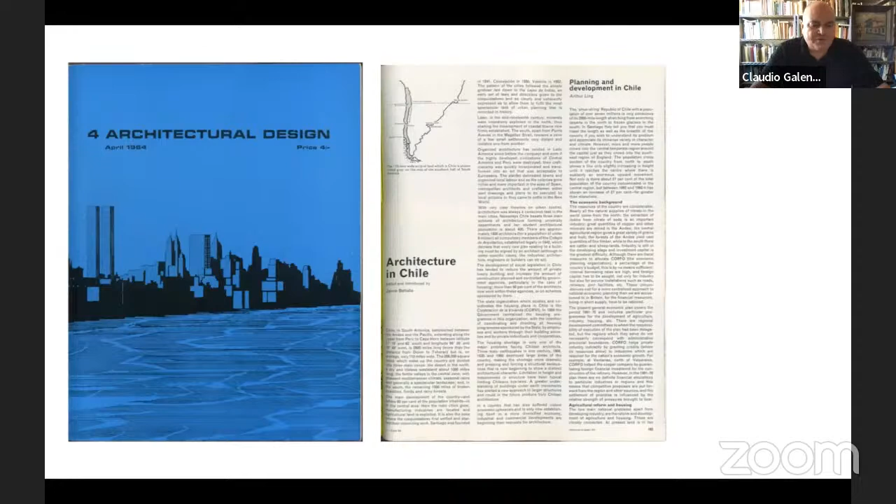This particular condition forced design with structural rigor, which over time defined an architectural identity. Some years later, architectural historian Ramón Alfonso Méndez, in an article for the Spanish journal Hogar y Arquitectura in 1970, declared that from a technical point of view, earthquakes had conceived a prudent people and forced them to take special precautions in structuring their architecture. Architect Oscar Barahona Álvarez, in another article about Chilean architecture published in the Spanish journal Nueva Forma in 1972, indicated that earthquakes characterized the constructions.

Until that date, several high-intensity events had devastated various areas of Chile: Valparaíso in 1906, Chillán in 1939, Concepción and Valdivia in 1960, La Ligua in 1965, Tocopilla in 1967, and Illapel and La Ligua in 1971. The expertise developed in facing these aggressive events had resulted in light constructions with limited life, or in very heavy architectures, resulting in high cost in foundations and structures.

As a summary, in the 80s, architects Humberto Eliash and Manuel Moreno stated that the Chillán earthquake of 1939 had been one of the main variables that had materialized modern architecture, preceded by another determining incident, the Talca earthquake of 1928. Finally, we will highlight what architect Max Aguirre stated, who said that earthquakes had been drivers of modernity.

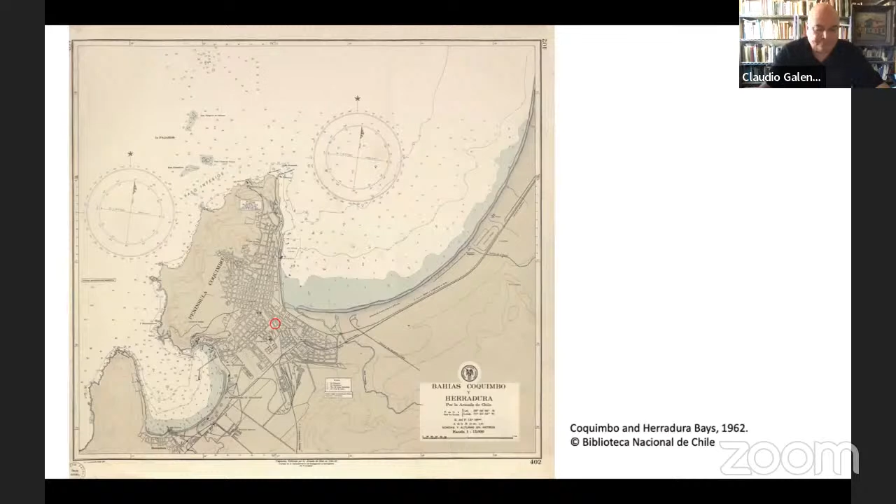Despite the impact of the 1967 earthquake, in April of 1970, the Minister of Health, Patricio Silva, confirmed that at the end of that month they would call for a public tender for the construction of a new hospital, and that the works would begin in July.

The new establishment would be built on land donated by the municipality of Coquimbo in the San Juan neighborhood, a sector to the southeast that was just beginning to be urbanized. On September 4 of 1970, a model of the hospital was displayed in the window of the El Ferrocarril store in Coquimbo to disseminate the new project, and towards the end of that year, the founding stone of the new establishment was laid.

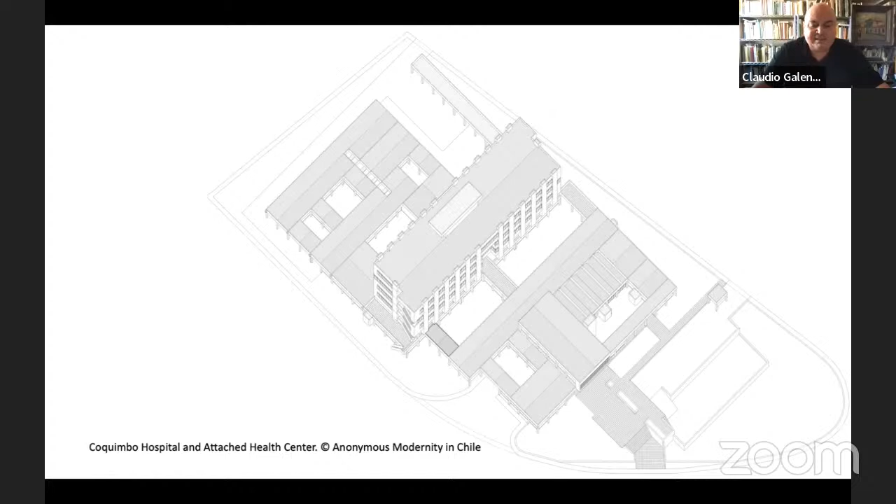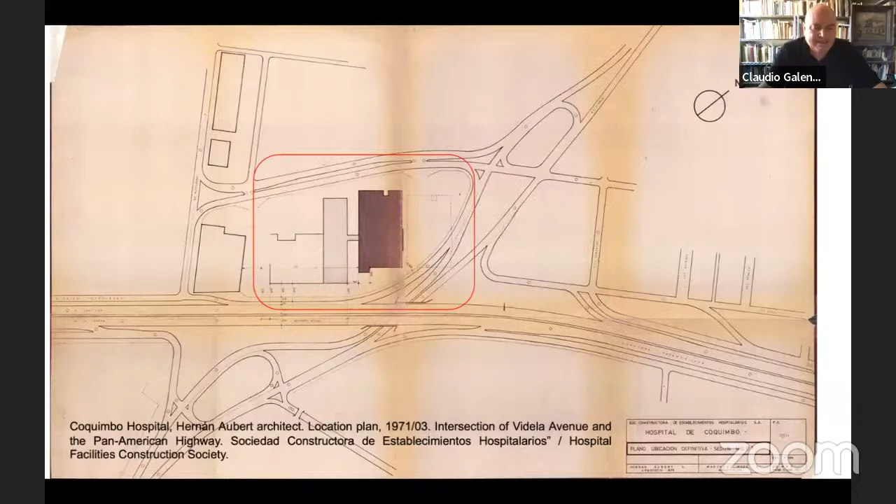Although the Sociedad Constructora de Establecimientos Hospitalarios, the Hospital Facilities Construction Society, had already started construction in the San Juan neighborhood at the end of January 1971, the press announced that a decision had been made to change the hospital location to a plot of land at the intersection of Videla Avenue and the Pan American Highway. The decision involved the Urban Improvement Corporation, or CORMU, which stated that the change was necessary because the land in San Juan was isolated, while the new site would be more integrated and serve a more comprehensive medical, technical, and urbanistic purpose.

However, on the land in the San Juan neighborhood, an urban general clinic or health center was built, which was inaugurated in June 1972.

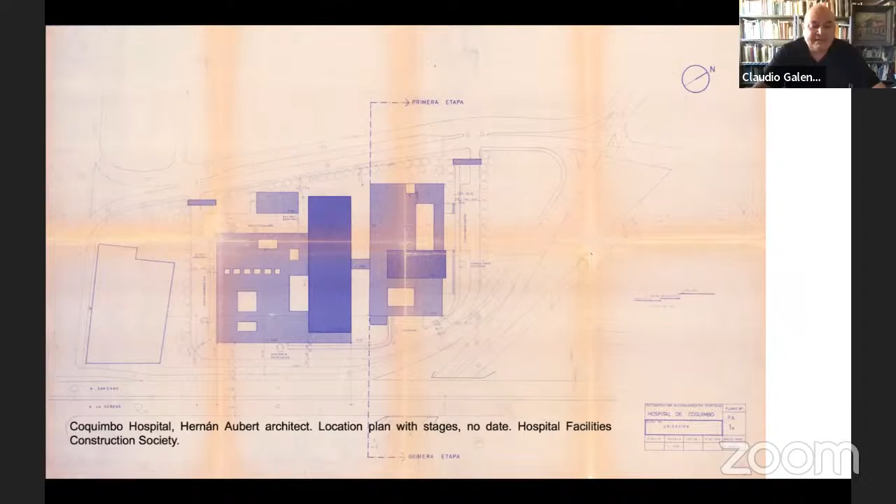The geomorphology of the chosen hospital site was an extensive plain, the isthmus of the Coquimbo Peninsula. It's no coincidence that the area is known as El Llano. It is a relatively flat urban space, but elevated like a low plateau, opening especially towards the west and east to the bays of La Herradura and Coquimbo. It's characterized by a pronounced horizontality.

In the course of the early stage of construction, the Coquimbo area was affected by a new earthquake on July 8, 1971, with its epicenter located between Illapel and La Ligua. Although this event did not impact the newly initiated construction works, it did affect a number of other facilities in different cities, leading to a plan for repairs, replacements, and construction of healthcare facilities carried out by the Hospital Facility Construction Society. In the province of Coquimbo, the replacements included the hospitals in Combarbalá and Illapel. The new hospital was built in two stages.

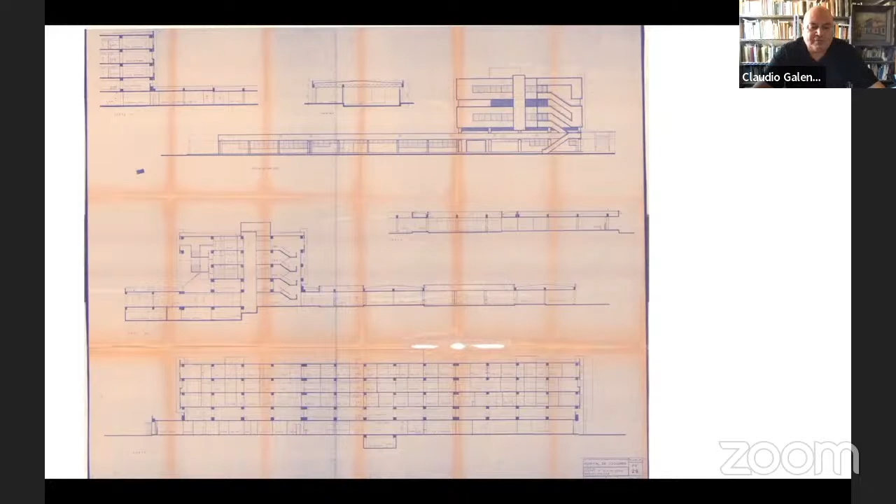On October 13, 1972, the northern volume, known as the Consultorio Adosado or Attached Health Center, was inaugurated, while the hospitalization tower was completed entirely by the end of 1975, with the transfer of service from the old hospital commencing at the beginning of 1976.

While the tower was being prepared, on March 13, 1975, a new seismic event occurred. As indicated by Urrutia and Lanza, the epicenter was in the sea in front of the port of Coquimbo, and its intensity was of a magnitude of 7.

There were 2 fatalities, 30 injured, and significant damage to public and private buildings. As Gonzalo Araya notes, at that time the medical service was being relocated from the emergency area on the first floor of the attached health center to the 3rd floor of the tower. However, the earthquake did not bring significant problems to the facilities, which had just been completed.

Finally, the hospitalization tower volume and its base volume extending to the south were inaugurated on March 26th of the same year. The press said, the most modern hospital in Chile. It exhibits impressive modern architectural lines and an excellent location.

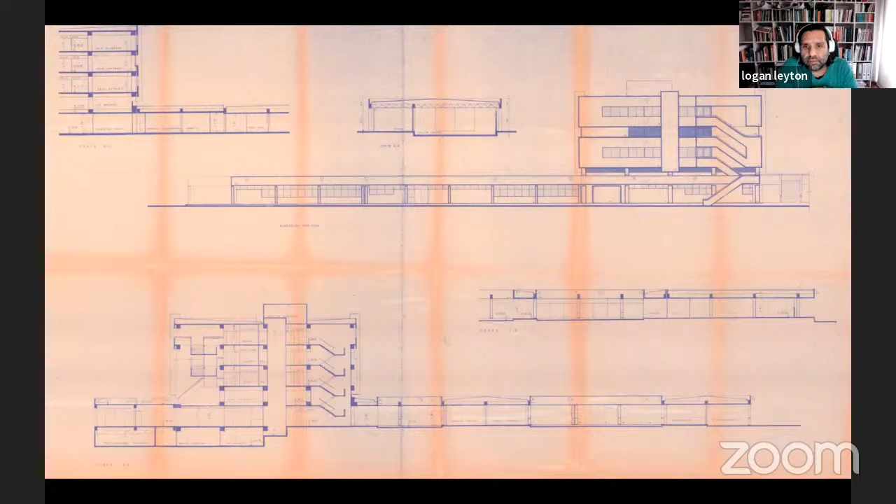Now we can see the installation plans. The next one.

So in May of 1980, the magazine Ciudad y Arquitectura published an article about the hospital, and through the report some errors appear: the sense of the north, a presentation of a first version of the project with 4 building levels, so it doesn't mention the mechanical floor in the second tower, and also the general organization complex use is very, maybe difficult to understand.

The magazine report also explained in terms the slab-tower type, but we have to see another thing that they don't mention—another change that the team of architects made in this typology, this family of buildings.

So we can see here that the building, or the tower precisely, is made by these pillars that are retracted from the facade. So we have this volume, these vertical volumes, that appear in the facade.

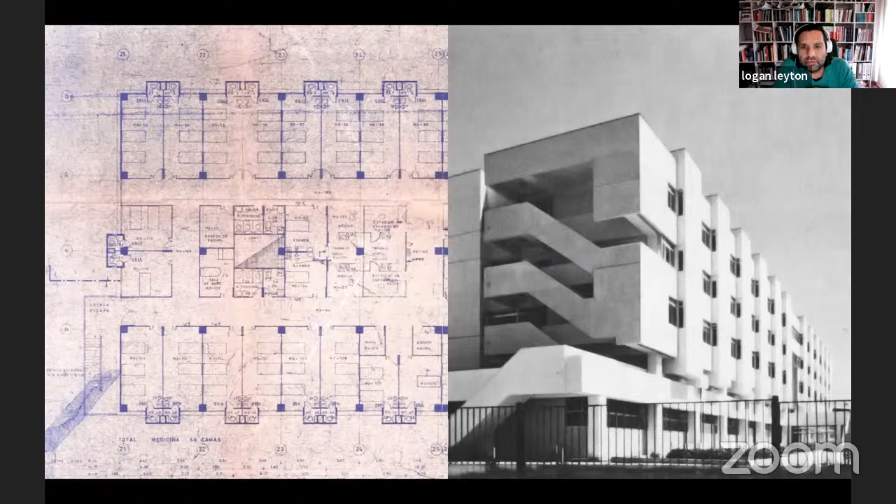Next one, please. This encounter, this movement from one side of the highway to another, produced an encounter of a different street, and this encounter is very special because it becomes the main entrance to the city of Coquimbo, on Avenida Nolasco Videla.

Between Nolasco Videla, a space forms between the streets at a bifurcation, and this bifurcation makes another street, Dr. Mucarcel. From a distance we cannot really perceive the street between the hospital block and the small park. The park is on the left hand of the screen, and the little hill where the hospital is located is on the right. It's also a little difficult to define the limits between the park and the small hill, with trees and natural species between the two spaces.

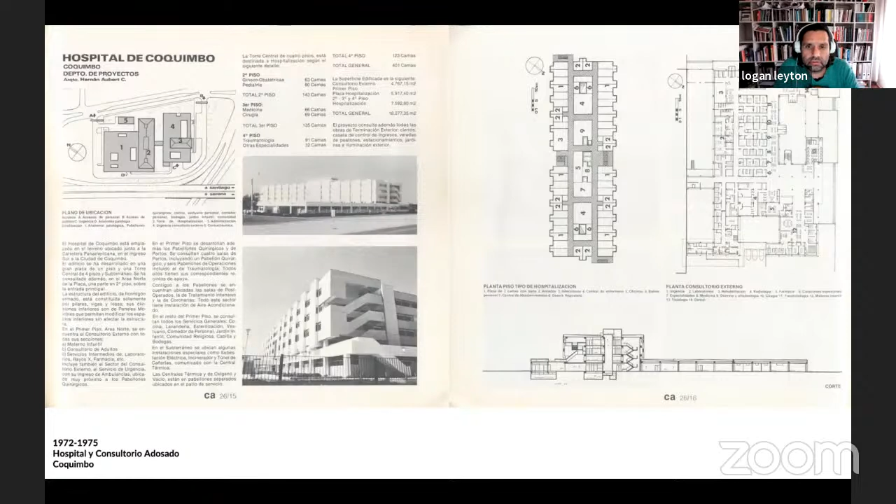Give me a second, please. Okay, this is again the establishment, the hospitalization floor. Next one, please.

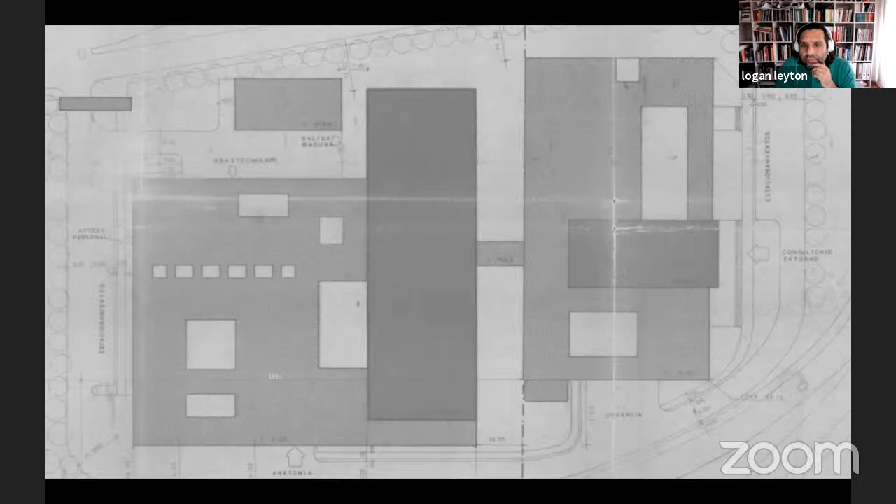And we can see here a different kind of yards. All the spaces that are not marked are different yards. The different colors also indicate different programs, and the height of the plaques. We see here the two plaques, and the middle one is the tower. Next one, please.

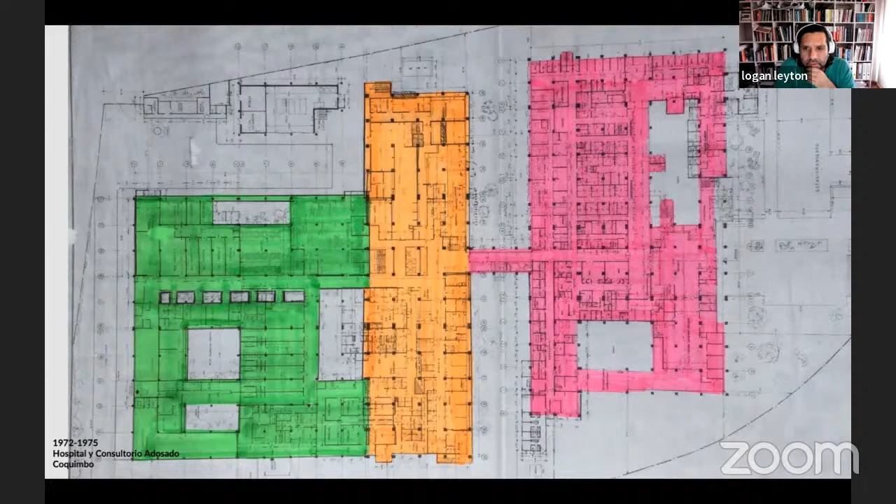We can see different yards. This is the entrance, where we can see the open space, or the access. We can see one for the chapel, another for the community, another for the kindergarten, another for the casino - not a gaming casino, I mean like a restaurant or coffee shop. Now we can see that it's very structured, very hard, very severe.

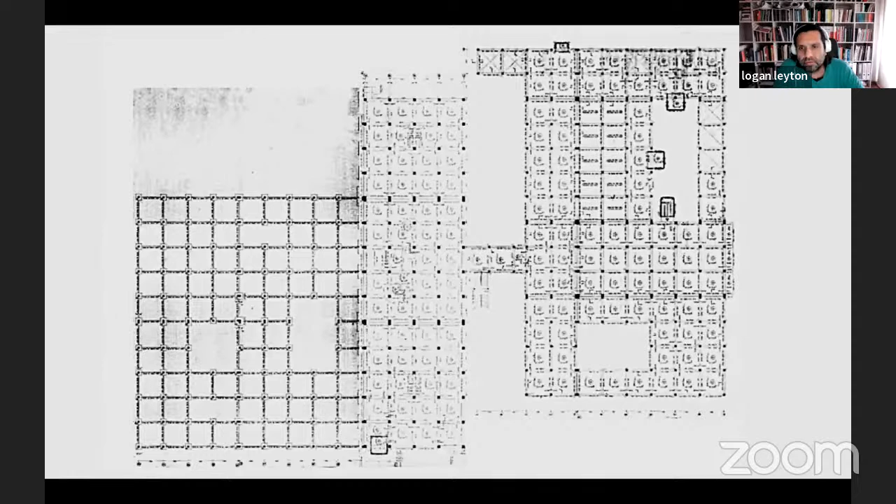Maybe we can see it again in a different way in the next slides, please. So this is the kind of relationship where the more intensive red color marks what is not allowed - the more private areas. The clearest red is the circulation area, and the middle red are the yards that are completely open, not just to the sky but open to the people, without access control. So the hospital is not just a succession of three different political and mandatory presidential moments.

Frei made it the law that financed the hospital. Allende moved it, changed it, and really directed the project. It was one of the most important projects for his government.

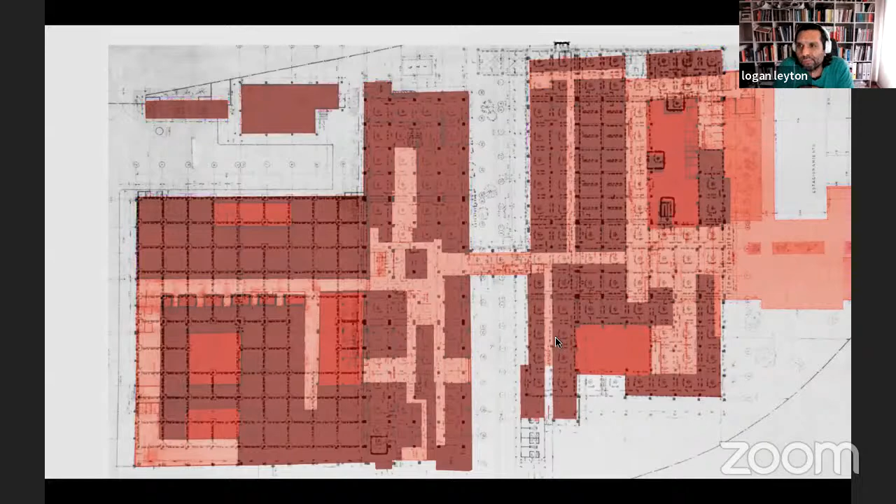Well, that's our presentation. I have some more, but I prefer to continue with Marco and Francesco for the time. Thank you very much.

Thank you. Okay, let's get started.

You see, it's clear. Yeah, perfect. Okay. Last time.

Thank you. First, at the beginning, we want to thank you for this invitation. We are very happy to have this opportunity to contribute to this initiative of Docomomo and this theme about healthcare architecture. We are professors at the University of Cagliari in Italy.

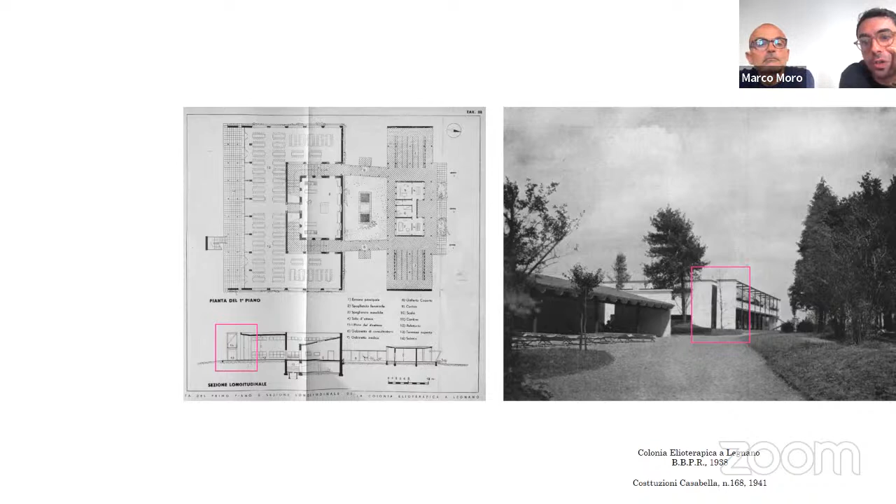This is an interesting detail compared with Ubaldo Badas' Colonia Dux, to understand his original approach. In fact, he combined all the functions in one single piece of architecture. He was clearly in search of a perfect balance between rationalist abstraction and plastic organicism.

According to our colleague and leading expert on this building, Paolo Sanjust, this project seemed to look beyond the Alps, without the mediation of Italian architectural culture, which only adopted the sculptural expressiveness of concrete in the mid-late 50s.

This emerged from the sequence of five project variations, all sharing the same plan: a multi-level curvilinear volume combined with a smaller entrance volume. The most substantial changes concern orientation. In the first version, the convexity is directed toward the sea, while in the second, and also in the built version, the curve's concavity is directed toward the sea.

Another big change concerns the structural solution. The first project showed a traditional load-bearing structure; in the later solution, a mixed structure with a concrete skeleton. The volume is suspended above a sequence of robust, rounded pillars that liberate the view toward the sea.

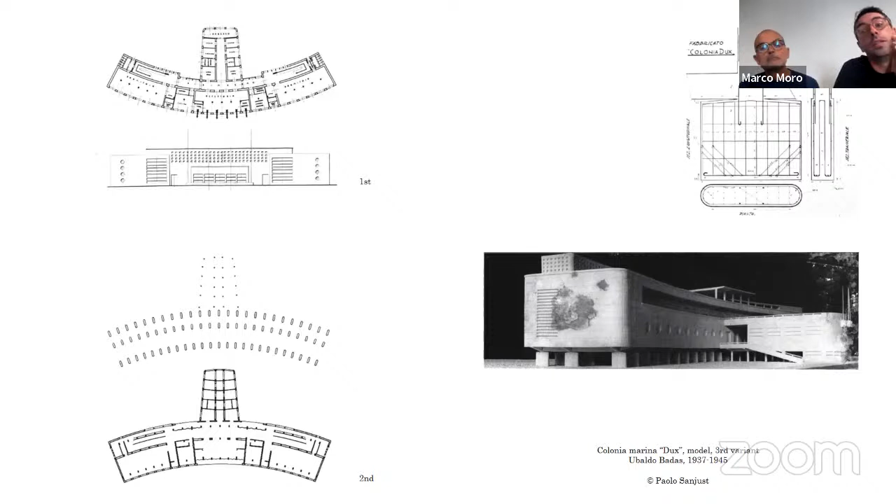The variegated register of windows is a remarkable element of rationalist architecture. Finally, among the distinctive elements of this typology, we notice the large ramps. Indeed, circulation and movement between inside and outside was a disciplinary ritual controlled by architecture itself.

This is the skeleton, almost finished, and this is the form in which the building will be delivered to the Anti-Tuberculosis Consortium in 1945. On the rooftop, you can see the addition of a wonderful pergola for sun bathing, integrated into the building to fragment its volumetric mass.

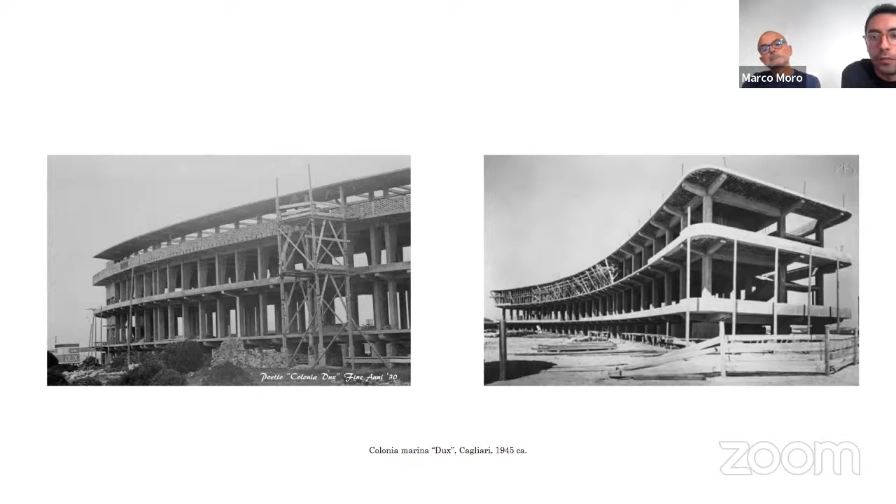In the end, the Colonia Dux designed by Badas is an unfinished work, not only a typological shift stimulated by functional distribution, but an attempt to build an artificial landscape in dialogue with a natural one. Not only the material expressiveness of an isolated building, but a modern architecture which incorporates intermediate spaces, free ground floor, and roof terrace, to promote an alternative project of the city.

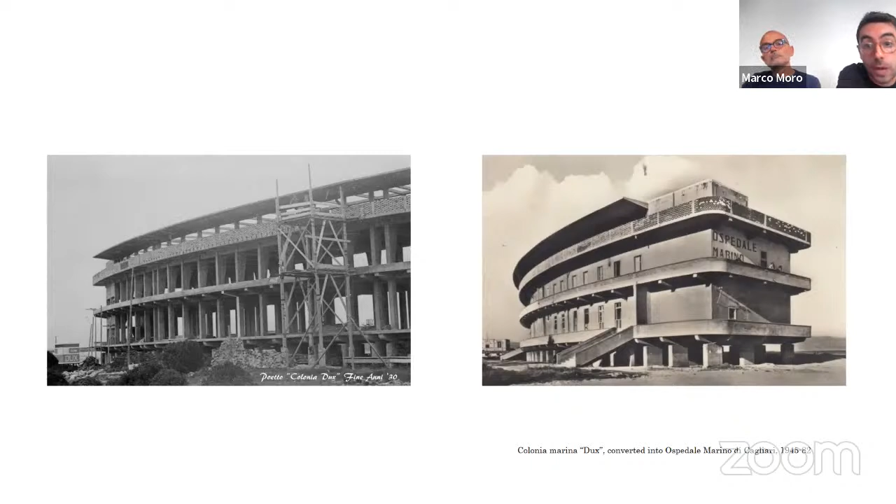Starting from 1945, the building was completed to be used in the emergency situation of the second post-war period. Simultaneously, both the external closure and new internal distribution were built for the uses of a new hospital, Ospedale Marino, which was definitely closed in 1982 and abandoned to its fate as a modernist ruin, with its internal skeleton as the only original element.

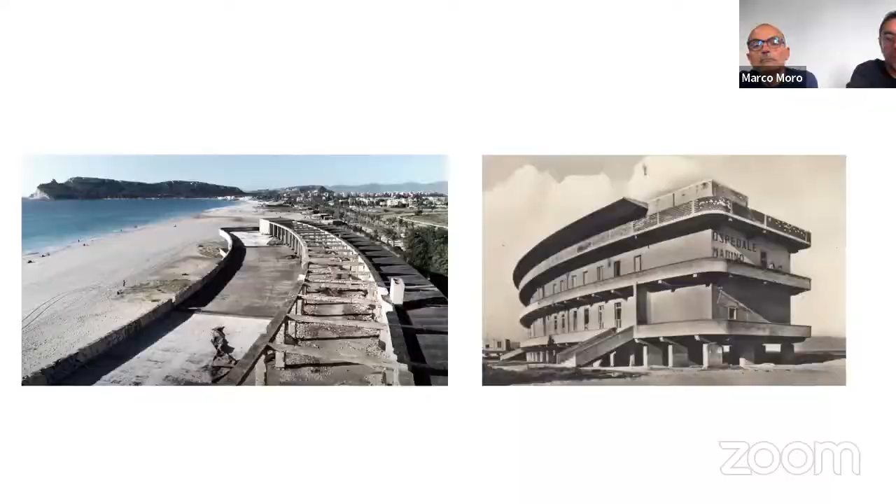As we said at the beginning of this presentation, this episode was preceded by a remarkable example of a machine hospital. The neoclassical San Giovanni di Dio hospital was built outside the medieval city. This building is emblematic in the design evolution of the modern typology, and in particular an outstanding case in the local context for the urban transformation of the city of Cagliari during its modern and contemporary history, and like Colonia Dux, is still waiting for its adaptive reuse.

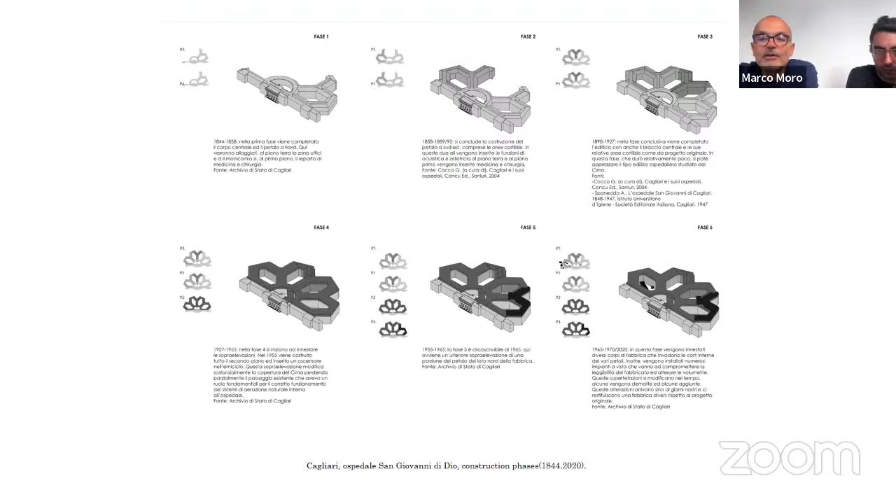We tried to understand the reason for this singular shape, considering that Gaetano Cima started the design of this building in 1842, after 1772. 1772 was a particular date because it was the date of the fire of the Hôtel-Dieu in Paris. The tragic destruction of the Parisian hospital started a very intense confrontation among architects and scientists, all called to study a precise prototype for a modern and rational hospital.

So we think that Gaetano Cima was very much influenced by these studies, and we can see a few typological examples, especially of radial types and of barracks types. The debate was opposing spatial organization models: central planning versus parallel rows.

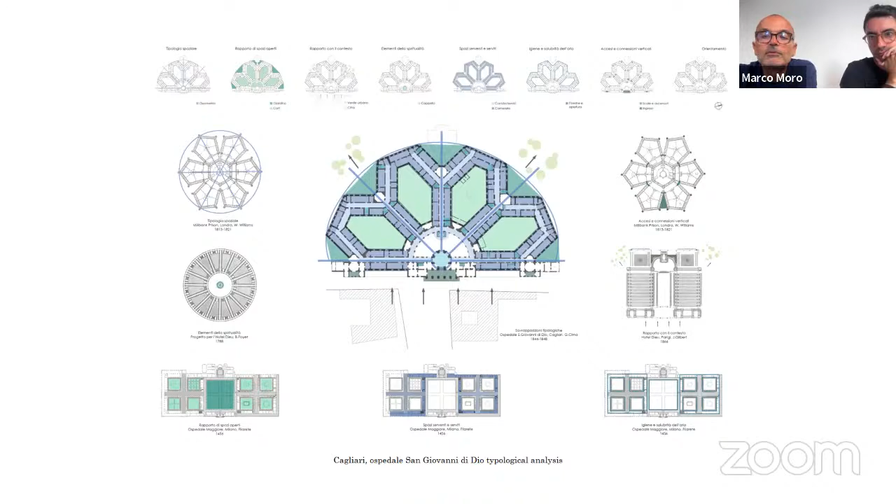The design by Cima is interesting because it is a hybrid solution that solves the contradiction of these two models and recomposes the fracture of form and function in a unitary response, compliant with the requirements of hospital organization and also responding to neoclassical style ideals of universality.

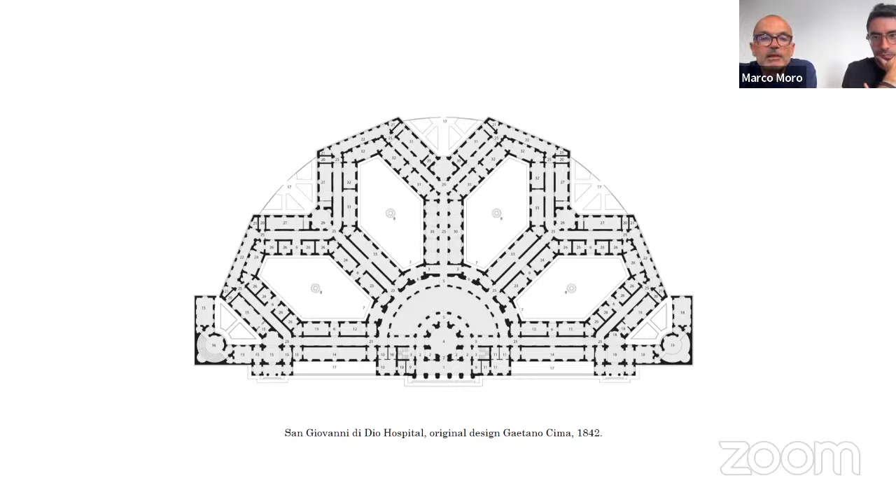So there was the original design of 1842, and it is a peculiar answer combining these types - a combination of the palazzo type and also the radial scheme, and also a remarkable example of separation of the complex into distinct wards. So the result is a radial plan reconceived as really a modern machine à guérir, to use Michel Foucault's words.

So we have worked on this aspect, developing a strategy that tries to overturn this point of view and considers these types as an integral part of the city, open and in continuity with the surroundings.

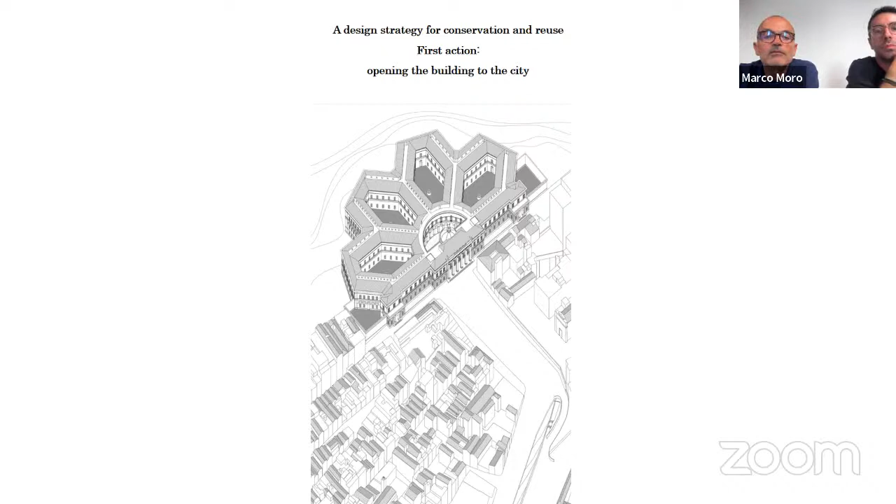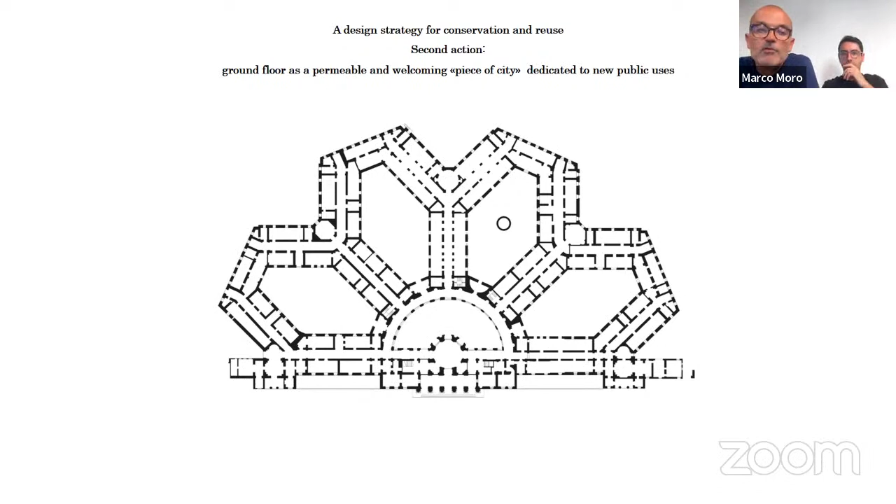So we tested our strategy based on two actions. The first action is opening the building to the city, creating new physical connections, entrances, and paths in peculiar parts. The second action, strictly related to the first, is about liberating the ground floor - imagine it as a permeable and welcoming piece of city, open and dedicated to new public uses. Freedom and movement characterize the use of this walkable piece of city.

With students, we concentrated just on a fragment of this building, the yellow part you can see, and we asked the students to apply different schemes, as you can see in the slides, which were kind of a prefiguration of new ideas of space. That was the start of the design. Imagine the strategy of reusing the space was about not modifying walls, but modifying the perception of space.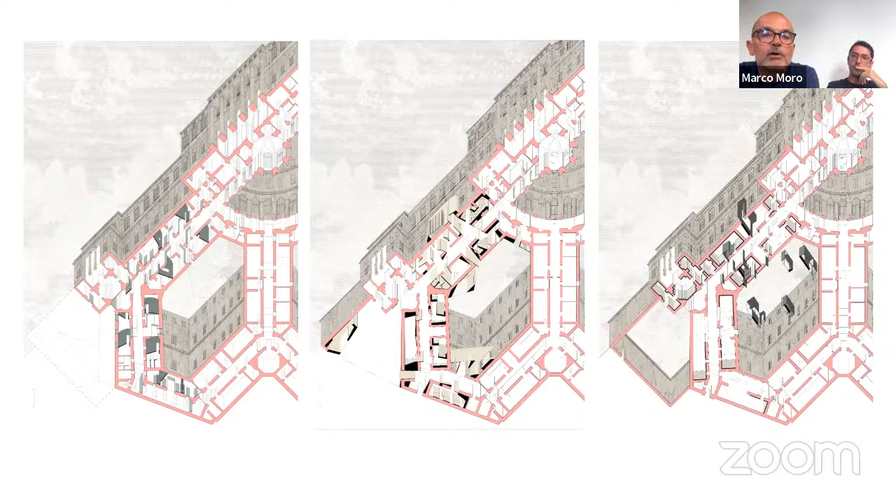So we limited the alteration to the historical material, except where the minimum revision of the walls and the material was justified as a critical action.

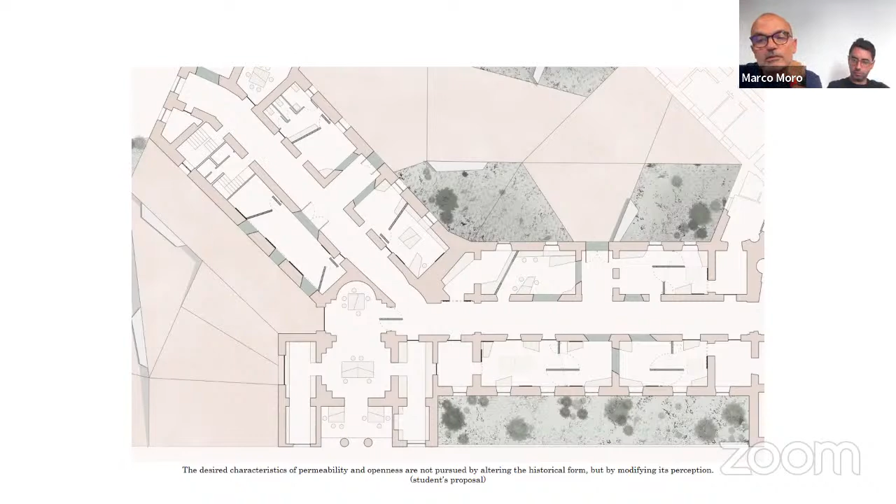We think that a major outcome of our work is related to perception. The desired characteristic of a new space is not achieved by altering the historical form, but especially by modifying perception - modifying some colors, or especially adding light pieces. Indeed, the addition of small artifacts and pieces is capable of generating a new perception of the monument, avoiding introducing new forms.

We believe that perception is a key element for reaching the goals of an adaptive reuse that is also effective to produce an integration with the city, in a general philosophy of conservation of the original part.

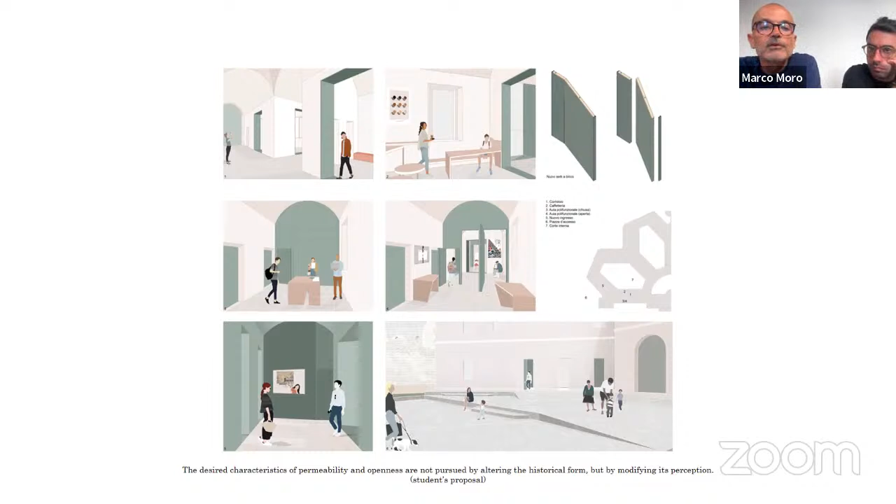So in the end, we showed two episodes in silent conversation with each other. We believe that the focus of this presentation is showing the potential of typology as an agent of transformation and reuse in close relationship with the city. We explore this potential as a design strategy applied to an ancient ruin.

So now we hope, and we think, our future challenge is to apply this kind of methodology to the modern ruin of Colonia Dux and to test its validity as a design instrument for adaptive use in a following design studio. So thank you for your attention. Thank you.

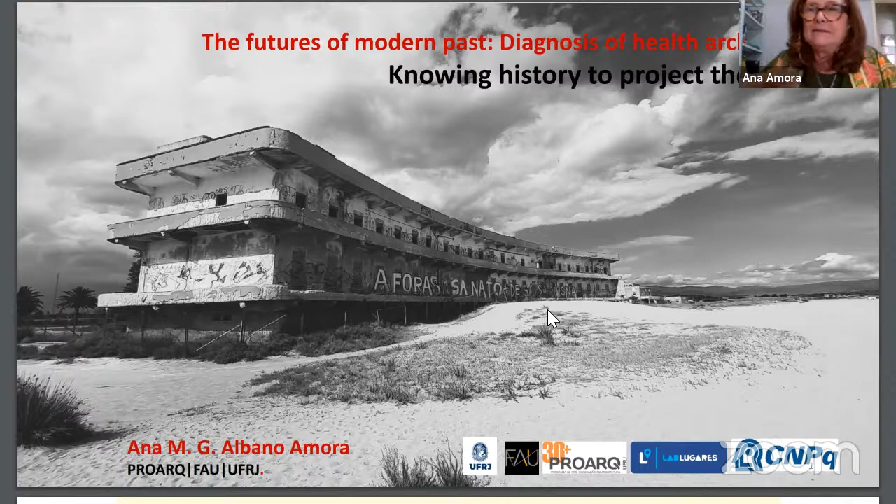In 2020, the COVID pandemic brought back to prominence this theme of architecture that Professor Segre called architecture in the shadow line.

In the review he wrote for the History of Health Collection, edited by Fiocruz, Renato Gama Rosa, who is here, is one of the organizers who will organize the collection.

Segre concludes by stating that the aforementioned collection would have definitively removed hospital architecture from the shadows in Brazil.

Although I have a lot to talk about, and I thought it was just 15 minutes, I have been working in the so-called shadow line since 2000, trying to bring to light this architecture and its typologies. I thought it was 15 minutes, but then I saw it was 20, but well.

Therefore, I chose to present an introduction to the topic and discuss two examples of Brazilian modern hospitals, which still fulfill their social function, despite the fact of their state of conservation.

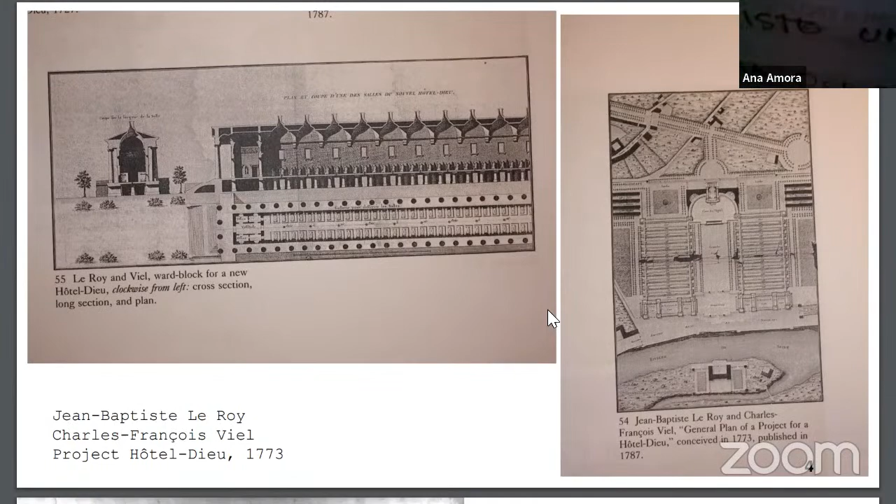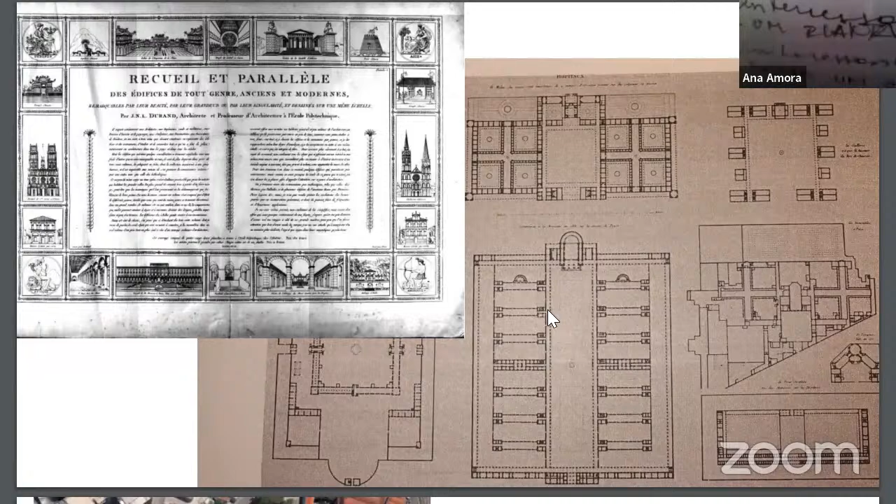This scheme remained until the 20th century and represented the first presence of the hospital theme in architecture manuals of the 19th century. It appears in the selection of ancient and modern buildings by Jean-Nicolas Louis Durand, which served as the basis for teaching architecture at the École Polytechnique in Paris and later at the École des Beaux-Arts in Paris, and which later spread throughout the Western world as the basis for hospital architecture built in the 19th and early 20th centuries.

In Brazil, this model remained and was added with other variants, such as the repeating pavilion located with appropriate solar orientation for diseases treated in isolation, like leprosy, mental illness, and tuberculosis, until the 1940s.

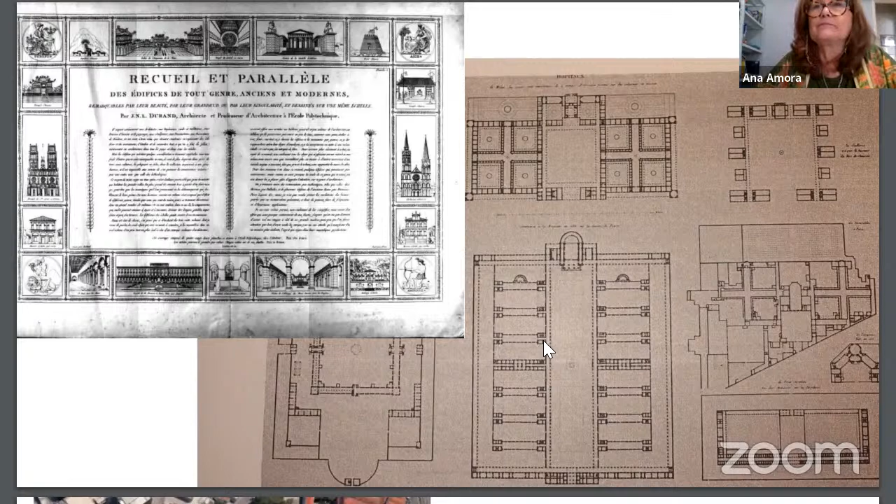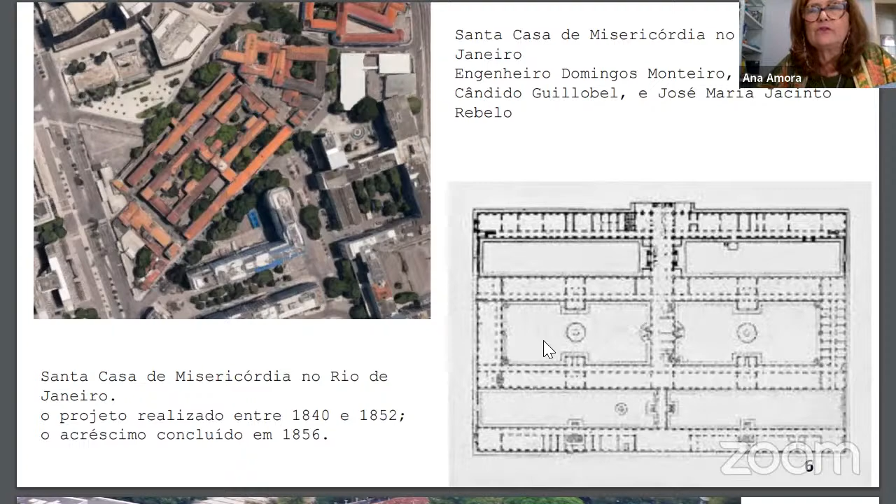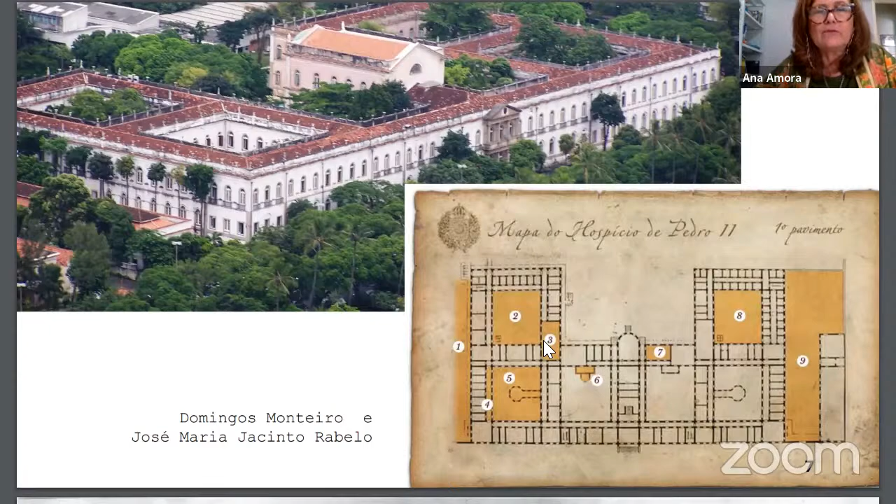In sequence, we can see Santa Casa de Misericórdia, built from 1840 to 1856; Pedro II, the second asylum, built between 1842 and 1852; Gaffrée Guinle Hospital, 1929; Curupaiti Leper Colony, 1922-1929; and Juliano Moreira Colony. I brought two settlements with different typology.

However, technical and aesthetic changes in the field of architecture with the modernization of teaching at the School of Fine Arts in 1930 in Rio de Janeiro, as well as state investments in education and health since 1930 with the first government of Getúlio Vargas, created a field for architects who were allied to modern concepts in the production of hospitals.

At the end of Vargas' first government, the building of the Ministry of Education and Public Health was inaugurated, developed by a team of Brazilian architects led by Lúcio Costa, with consultancy from Le Corbusier.

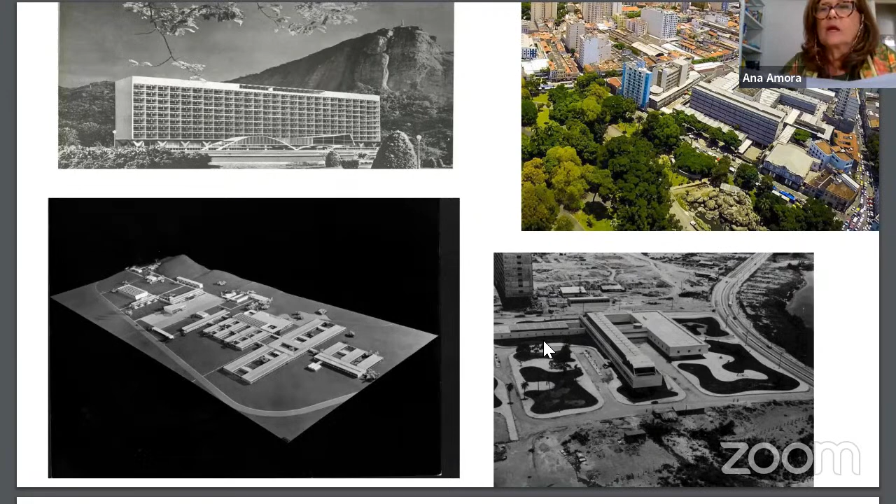I chose two examples of hospitals studied by us at Lab Lugares, and I would like to thank the research team and the researchers, like Thaysa Malaquias, Michael Morouco, Gabriele Silva, and Letícia Pessoa.

These examples maintain the use of healthcare. This choice was not easy, even though in our country it's common to maintain the use of a hospital. This implied changes and often losses of their original characteristics. However, the two hospitals can be considered examples of the idea of the Carioca School at different times.

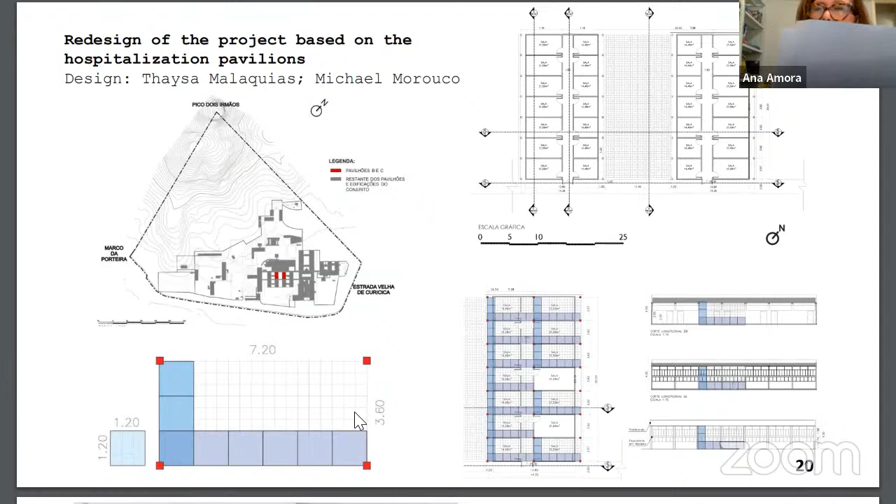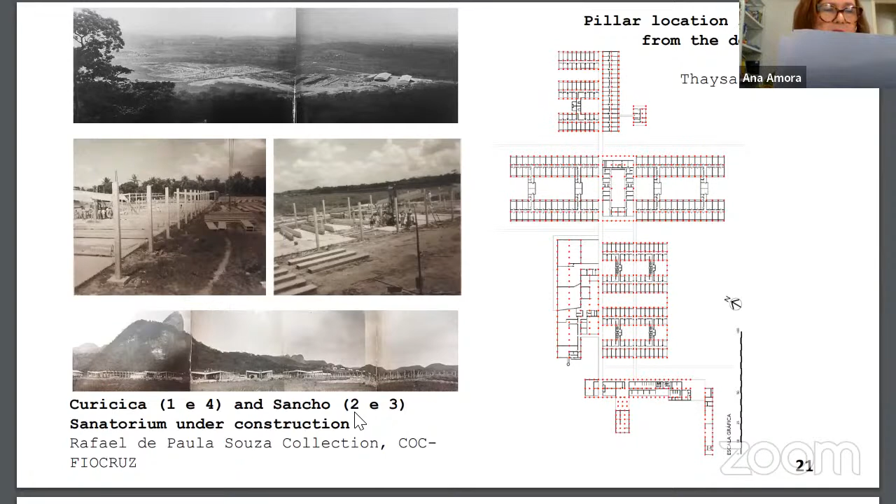The pavilion-type project combined design rationality with the construction process in a concrete structure cast in place. For this end, the architect chose a grid of 1.20 by 1.20 meters, which organized not only the construction process but the implementation of the building on the land, the division into pavilions and courtyards, as well as the design of the facade and internal space.

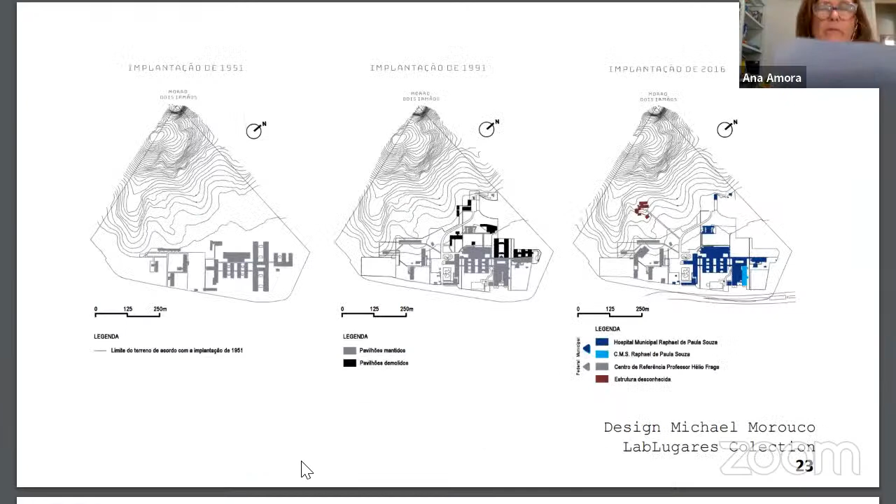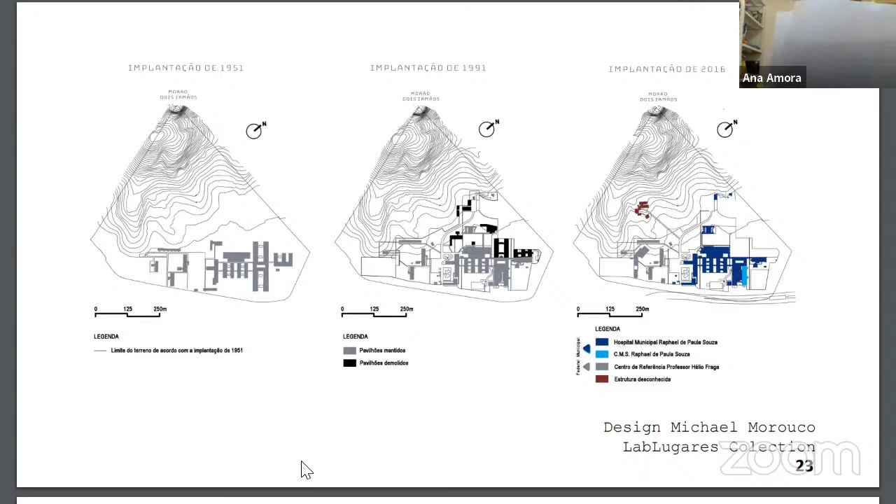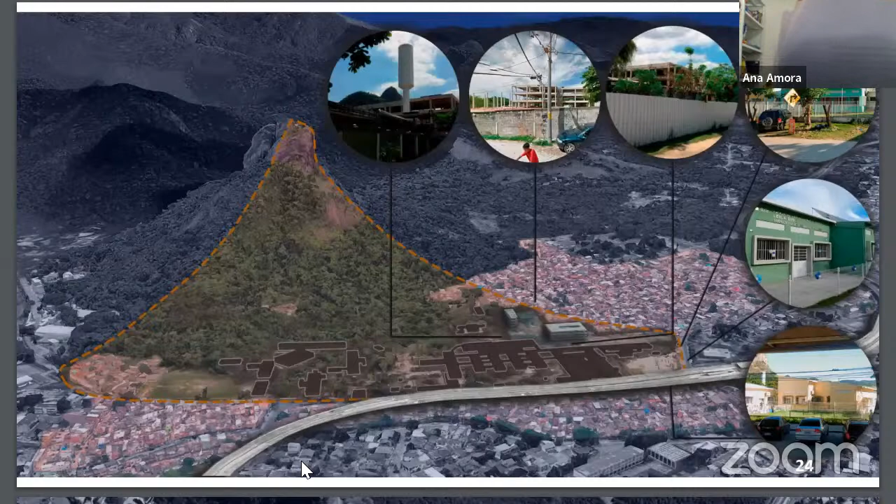There were many changes over time, especially in the hospital area of the sanatorium. The research area is better preserved and is federal, owned by Fiocruz, while the hospital area was municipalized and some pavilions were demolished. The area was used to construct other buildings for public service that do not match a hospital that treats tuberculosis. You can see in this picture the construction of a school, which is not a very good use for the site.

But the main issue, which even had an impact on the decisions for this construction, was the intense urbanization of the sanatorium surroundings, with low-income housing communities we call favelas. We can see in the image that these communities have already advanced beyond the limits of the sanatorium lands.

Another problem was the construction of the BRT rapid bus transport on an elevated road, which has a visual and environmental impact on the sanatorium area. The visual impact is clear, as the horizontal, low-rise construction contrasts with the verticality of the viaduct. The environmental impact refers to rainwater drainage, as the hospital land is now at a level lower than the BRT road.

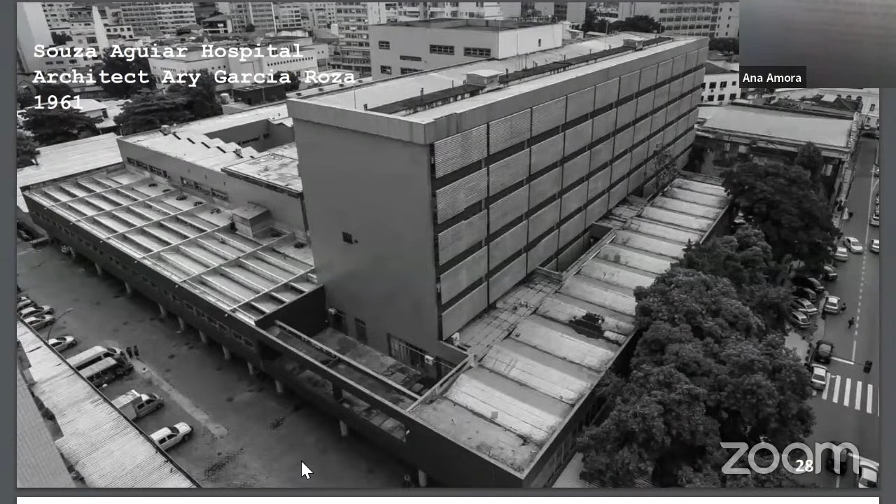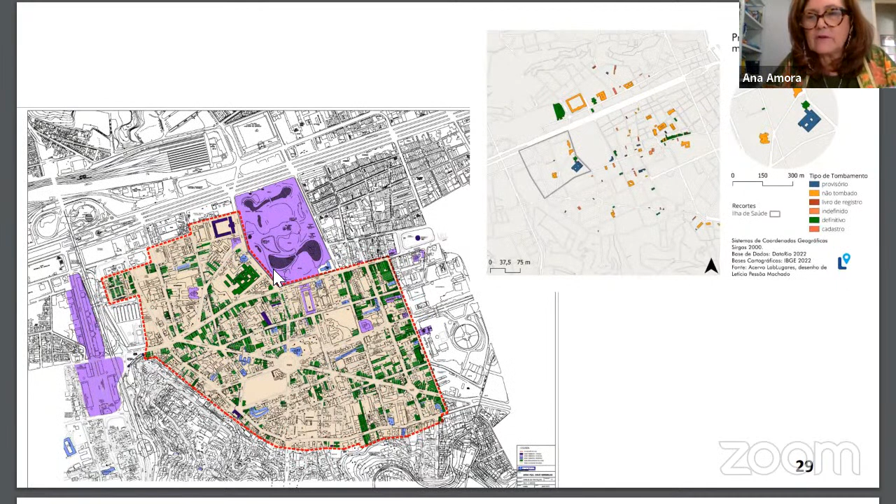Built in 1961 by architect Ary Garcia Roza to be a set of hospital buildings, the Hospital Municipal Souza Aguiar, HMSA, is located in a historical area in the center of the city of Rio de Janeiro, classified as heritage and with important historical monuments. Furthermore, both in its surroundings and on the HMSA grounds, other healthcare buildings were located.

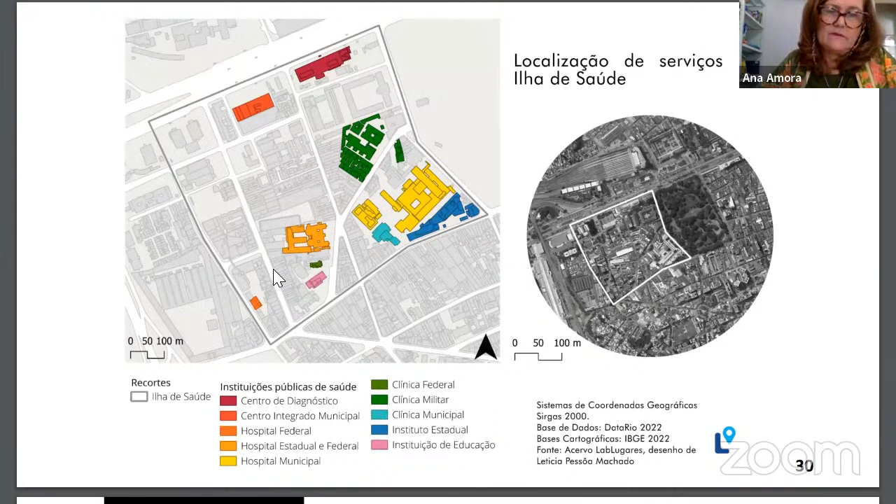You can see there the other buildings. Despite having a design with a T-shaped tower typology on a rectangular basis that follows a grid of 1.20 by 1.20 meters, it's not as evident as it is in Curicica.

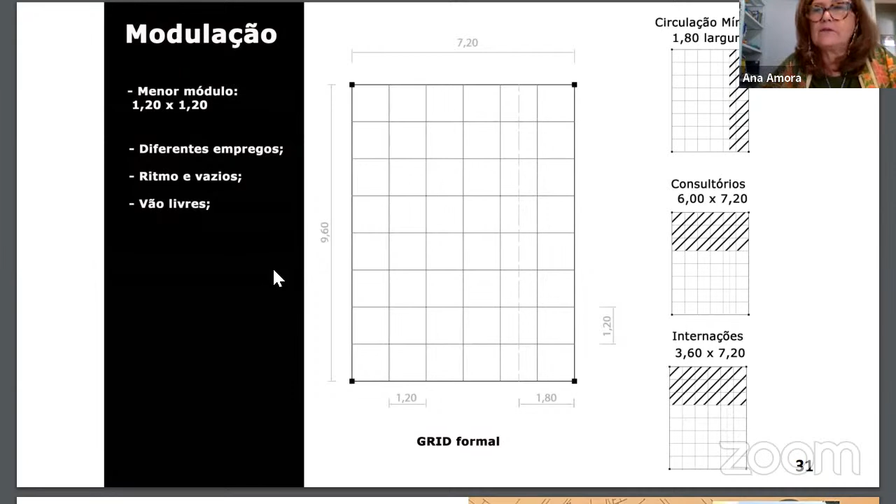But its main characteristic, and the reason it is preserved as a monument, is the existence of works of art, such as a mural and a vertical garden by the artist and landscaper Roberto Burle Marx, which forms an architectural promenade together with a chapel designed by Garcia Rosa, which includes remnants of the old constructed hospital that existed there.

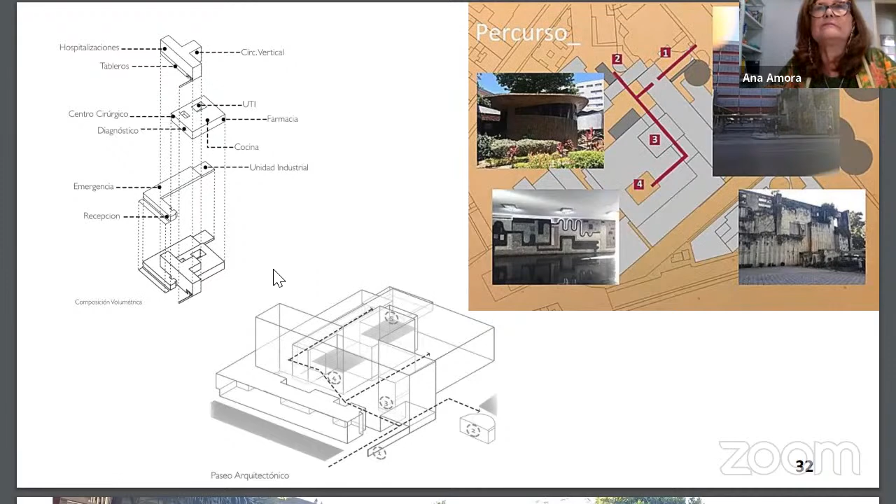It's the condition of the late vertical garden by Burle Marx, the old building and the new building in construction. This vertical garden was built in the remains of the old building. The chapel and the mural by Burle Marx.

Furthermore, it is a hospital complex and houses the center that directs healthcare services in the city. However, the conditions of open space, such as sidewalks, patios, reception, and sitting areas, leave something to be desired. The yards are occupied by cars, the sidewalks are in poor condition and small in size, and there are no outdoor seating areas.

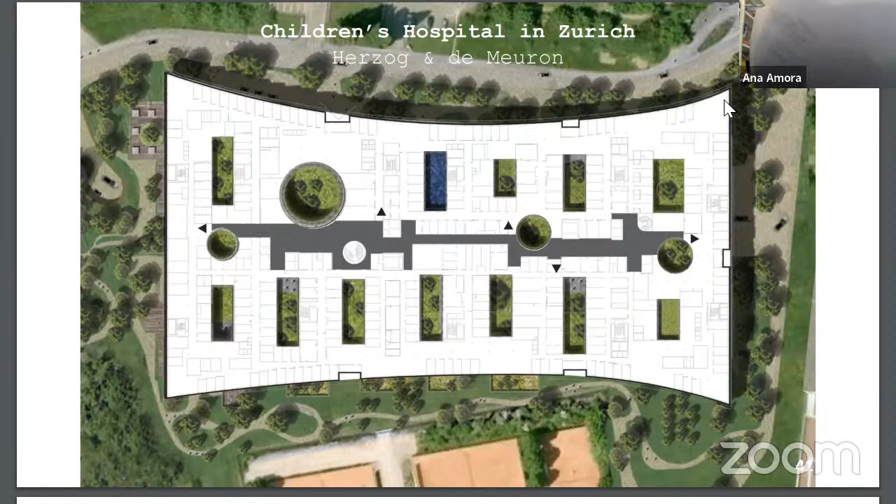In the periphery of the building are located the rooms for the patients. To this end, I hope we can discuss the subject further and take these ideas to public and political managers, as the healing machine can also be a machine for well-being and sociability, as a common good for everyone in the city. That's it. Thank you.